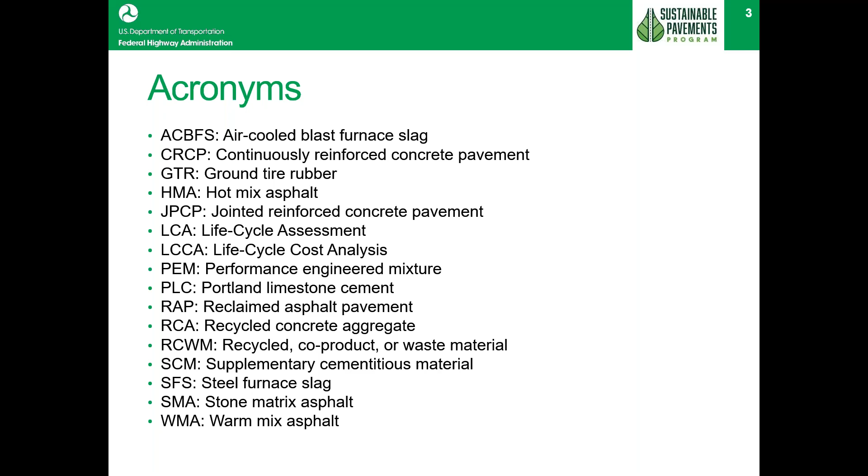Good morning and good afternoon to some of you. I would like to welcome you to the Sustainable Pavement Systems webinar series. Today's webinar will be on pavement end-of-life considerations, and our presenters for today will be Tim Aschenbrenner and Rick Menninger.

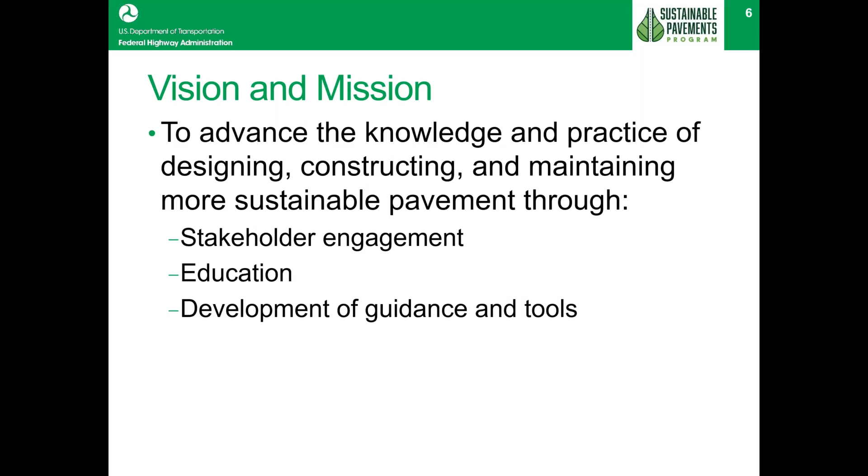Before we get started, I would like to let you know a little bit about the FHWA Sustainable Pavements program, which began in 2010 with the vision and mission to advance the knowledge and practice of designing, constructing, and maintaining more sustainable pavements through stakeholder engagement, education, and development of guidance and tools.

Some of those tools include the Sustainable Pavement Systems webinar series. Today is the 6th of the series of 10 webinars. You will receive 1 professional development hour per webinar, and upon completion of 8 out of the 10 webinars, you will receive a course completion certificate.

The Sustainable Pavements program also developed the FHWA Sustainability Ambassadors, a group of FHWA employees from different disciplines whose goal is to expand the knowledge and outreach within their field that complements the Sustainable Pavements program.

From today's webinar, you could learn what end-of-life considerations are and how they relate to pavement sustainability, some end-of-life options for asphalt and concrete pavements, and strategies to improve end-of-life sustainability of asphalt and concrete pavements.

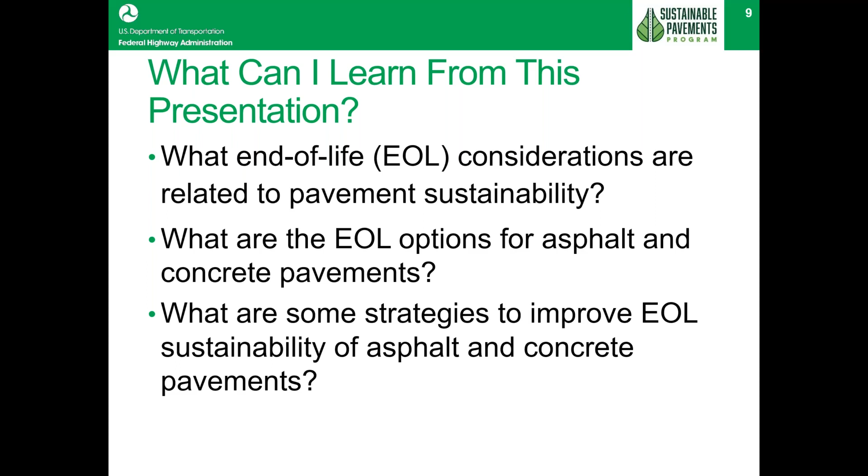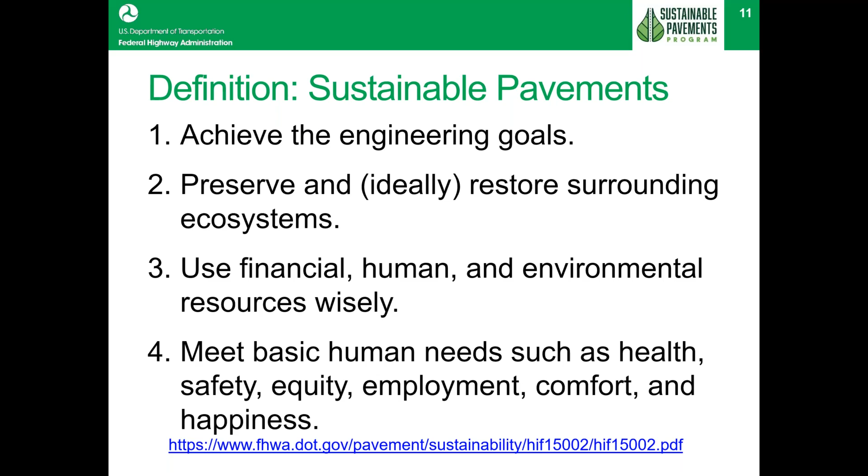Before we get into end of life, we should learn why we should care about pavement sustainability. From the program, we developed the definition of sustainable pavements: 1, to achieve the engineering goals; 2, while preserving and ideally restoring surrounding ecosystems; 3, use financial, human, and environmental resources wisely, while meeting basic human needs such as health, safety, equity, employment, comfort, and happiness.

With that, we've focused on the triple bottom line, the benefits of being more sustainable, looking not only at economic benefits but also environmental and social, which include reducing energy and noise and improving air quality for environmental, and improved safety, ride, and conservation of resources for social benefits.

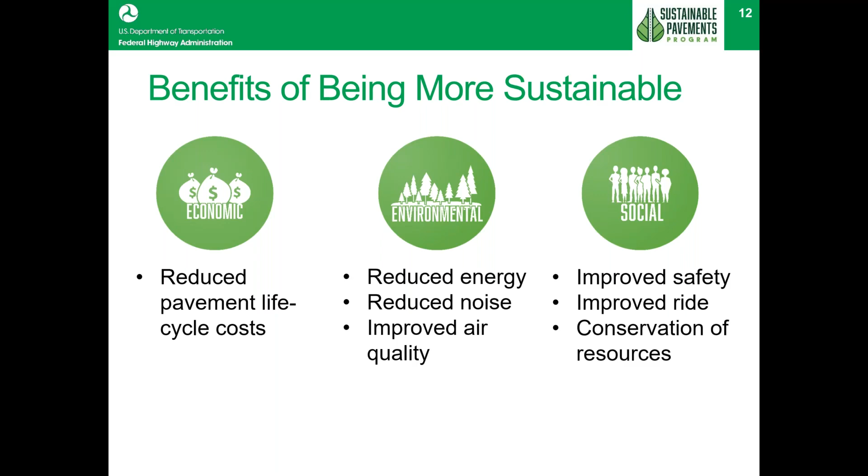Throughout this webinar, you will see that there are opportunities to improve sustainability throughout the pavement life cycle. Today's webinar will only focus on the end-of-life considerations.

With that, I would like to pass on the webinar to our first presenter, Mr. Tim Aschenbrenner, a senior asphalt pavement engineer with FHWA headquarters on the pavement materials team. Mr. Aschenbrenner specializes in asphalt pavement and materials as well as quality assurance. He joined Federal Highway in 2012 as a mid-career hire into the Resource Center, and prior to that he was with the Colorado Department of Transportation for 25 years, as the state materials engineer for 9 and the construction engineer for 3. With that, I'll pass the microphone to Tim Aschenbrenner.

Okay, well, thank you, Monica. Before I get started, I just want to do a check. Monica and Kurt, can you hear me and can you see my slide?

Hello? Yes, Tim, I can hear you. We can see it, and your sound quality is good. Okay, thank you. Just a little bit different than we did our practice with the changes, but yeah, I'd be glad to go over some of the

End-of-life considerations on pavement sustainability. So pavement end-of-life, what is end-of-life? I'll define it through some examples. The primary categories are reuse, recycling, and disposal. Each one of these options has costs, both economic and environmental, and these have to be considered on a project-specific basis.

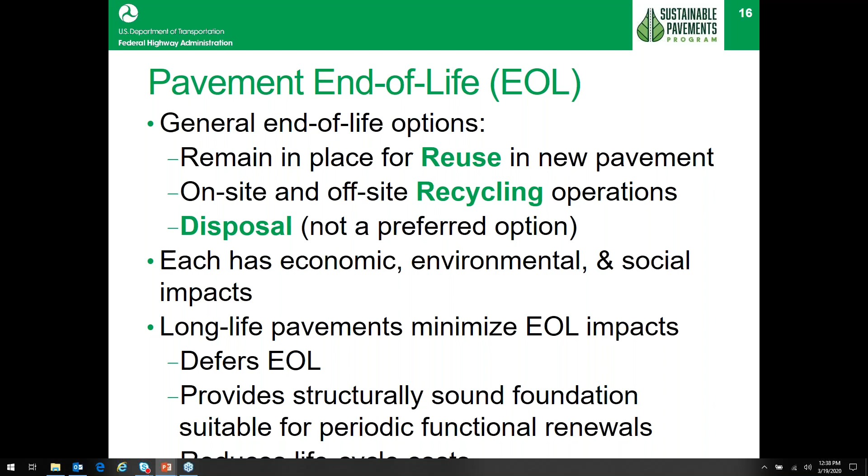Life cycle assessment, LCA, is how we evaluate the environmental impacts. I'd like to emphasize that having a long life pavement is a very important strategy to minimize end-of-life impacts. Deferring that end of life to a time out in the future is important, and that involves building a structurally sound foundation that may only require periodic functional renewals on the surface. That process really reduces overall life cycle costs.

In looking at end-of-life considerations, there are several options to get a realistic input. Some of these are off-site or on-site. Off-site might be a plant located off-site; on-site could be different types of in-place recycling. Demolition and disposal costs are self-explanatory, and might include tipping fees or demolition cost. Transportation is also a factor since we have to haul those materials, and I'll go over transportation costs in a little bit.

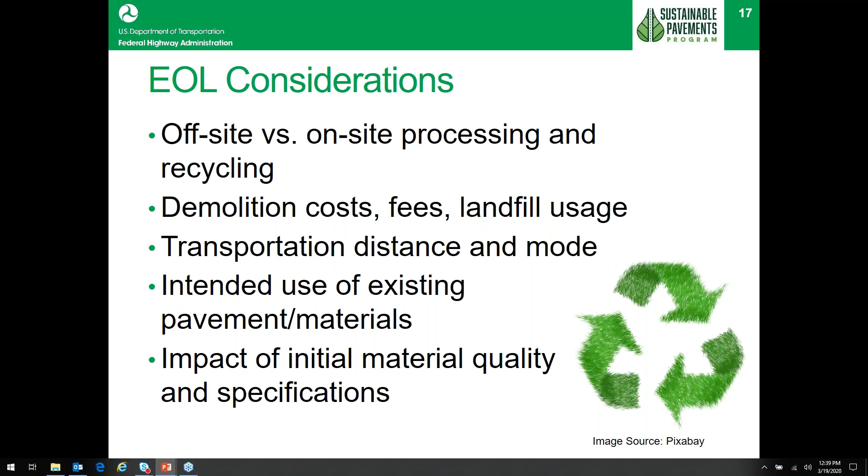The intended use or application is also important. If you're going to use that material in a surface layer, a base layer, or an embankment or fill, that impacts the processing of the material, since the quality needed is different in each of those layers. So quality is also a big impact.

On the previous slide I mentioned five end-of-life considerations, and here's one I'll go over as an example: on-site processing. For on-site, costs are generally lower. We'll have reduced fuel use because we're not hauling the material, or at least not hauling it far. There are certainly social benefits as well.

Yourself and your neighbors always experience traffic delays going through a construction project, but it won't be as bad if the construction traffic itself isn't causing those delays. So for on-site processing, there's a big social benefit from reduced traffic, and the economic benefits of having the material and processing costs right there on the project are substantial.

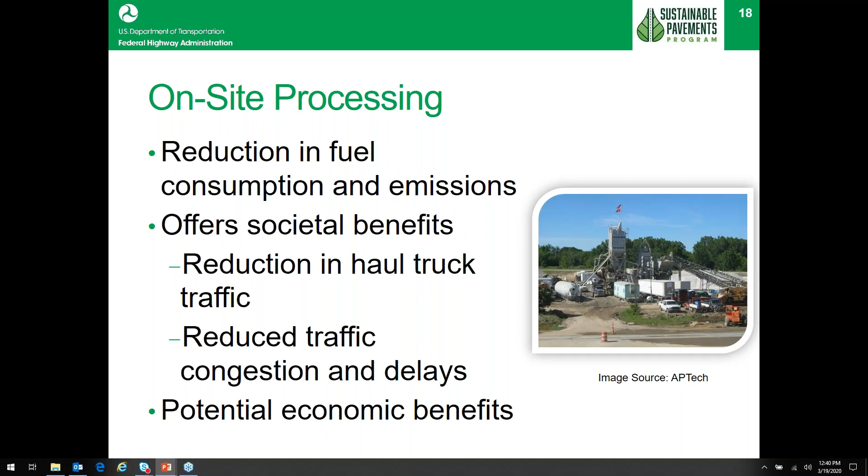For pavement end of life, I mentioned the three options: reuse, recycle, and disposal. To discuss the importance of reusing or recycling, consider the example of depletion of quality aggregates. This depletion is occurring—even where I live, there's an aggregate source I'm familiar with that built many projects, and now it's been reclaimed into a nice scenic lake. New aggregate sources aren't coming in very often.

So we really want to reuse and recycle as much as we can. Theoretically or ideally, we might talk about a zero waste pavement construction stream. That would mean that as a pavement reaches its end of life and we build a new pavement meant to last a long time, we make sure to use all of those materials back in the new pavement. That would be a zero waste construction stream. Although idealistic, it's probably close to happening with several pavements now.

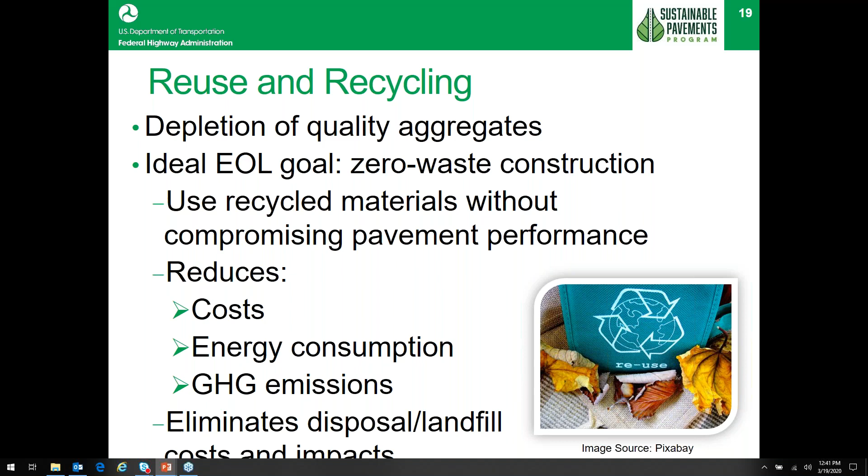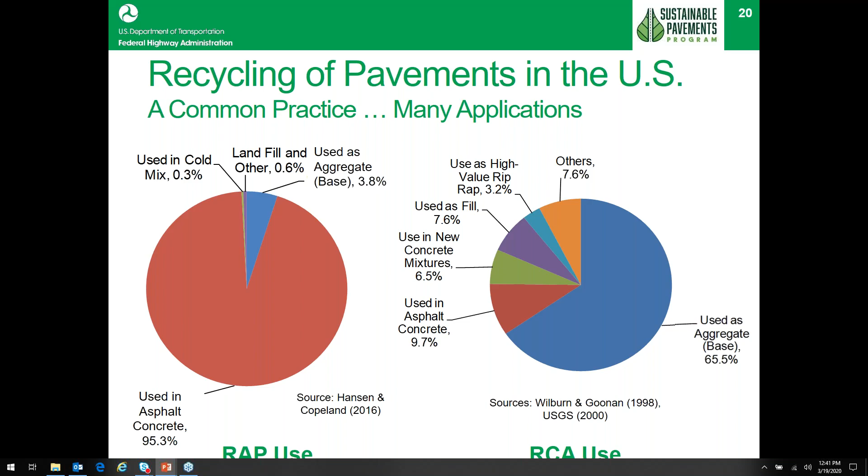So I think in pavements we're being very conscientious in this area. If we look at asphalt and concrete—RAP, the reclaimed asphalt pavement, or RCA, the recycled concrete aggregate—very little, if any, is going to landfills. It's being reused: about 99% of asphalt pavement is recycled or reused. In 2012, that was about 60 million tons. There's about 140 million tons of concrete, including both pavement and demolition, in 2014. This is a valuable material that is being reused often.

Now, transportation is a big process, whether we're moving materials from a project site to a central plant or to a landfill, and most often it's done by trucks. You can see that trucking is the most expensive method, so really minimizing transportation of these materials is a key consideration.

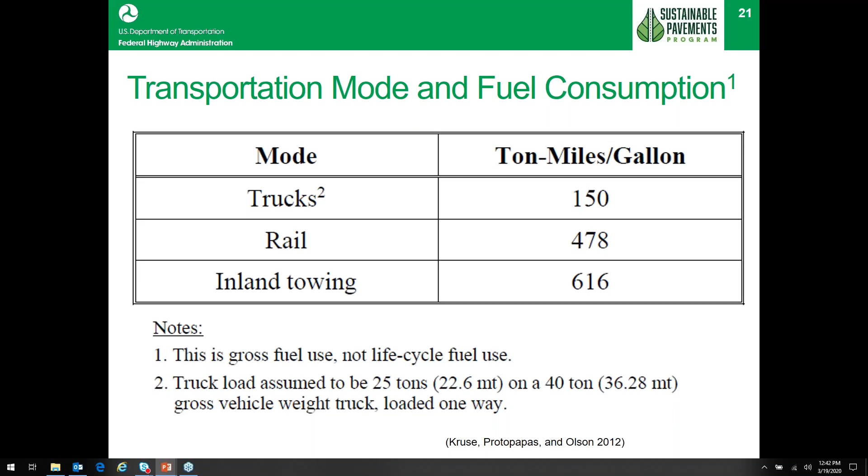As we look at reuse and recycling, we can try to optimize how much we reuse or how much we recycle. To optimize, that includes economic, environmental, and social impacts that are done in an LCA, or life cycle assessment method. Clearly, we don't want to compromise performance.

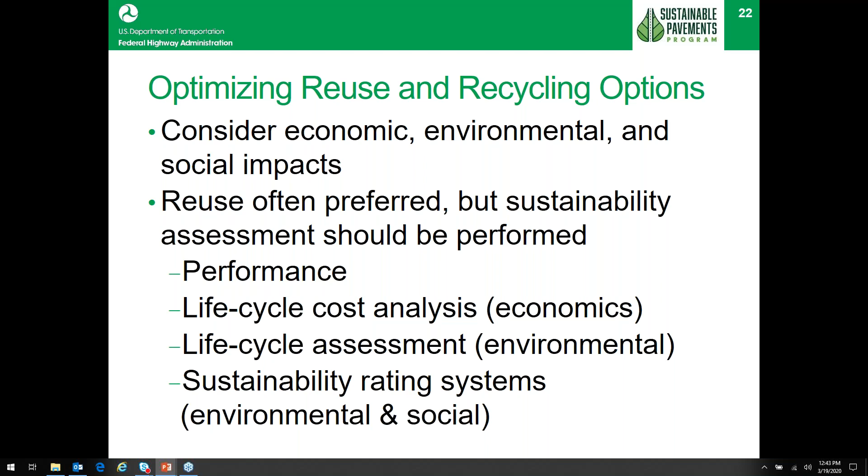Now, we had a long-lasting pavement before. We want to make sure we have one again. But these tools can be used to do this optimization. One is life cycle cost analysis, which looks at the economic benefits and trade-offs. LCA, as I mentioned, the life cycle assessment, looks at the environmental impacts. Then there's also sustainability rating systems that look closely at the environmental and social impacts.

So that section was on pavements in general. Now I'm going to shift a little bit and talk about asphalt pavements specifically and end of life. Not surprisingly, we have reuse, recycling, and disposal. Reuse, an example of that with asphalt pavements, might be a perpetual pavement that has a strong foundation, perhaps a crack relief layer, and then a sacrificial surface layer that's milled and overlaid at periodic times.

Recycling, examples of that could be in-place recycling with full depth reclamation or cold in-place recycling, or even at a central plant. And then disposal, although not preferred, we really don't see that much with these pavement materials because they have such a tremendous value. They're almost always reused and recycled.

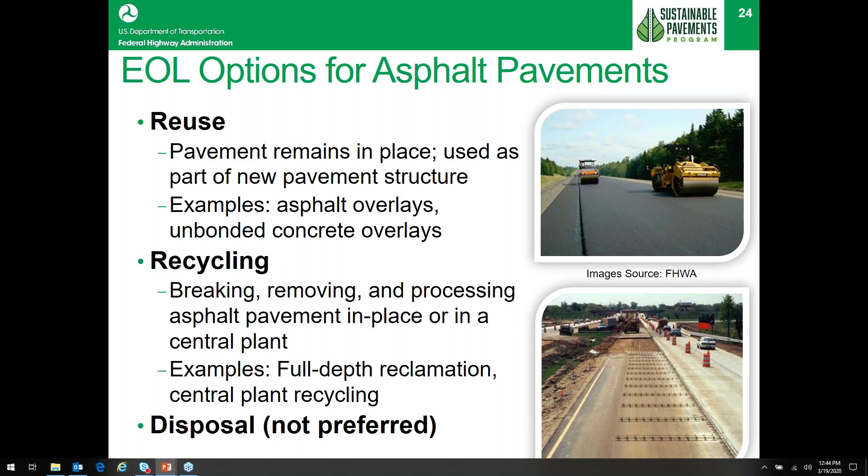So for reuse, if we were to look at reuse and want to evaluate a pavement, here's a series of questions you might ask to see if it's appropriate. Some of the most important ones are: is the foundation providing adequate support? Is there a lot of patching or blowouts? How much repair is needed? These questions can help guide if we're able to reuse or not.

And if we are able to reuse it, some strategies with asphalt might be some corrective milling prior to an overlay, or perhaps a concrete overlay to address load carrying capacity.

Now, reuse may not be feasible. Sometimes there are geometric and safety issues that develop. Could include clearances under overpasses, needing to change the alignment for clear sight distance, side slopes needing to be adjusted, and so on. But these are all factors that should be considered when you look at reuse.

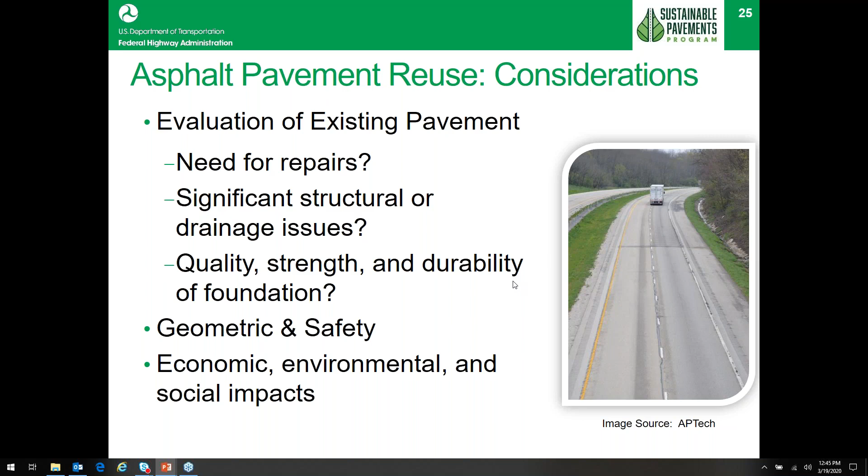We're not always able to reuse, so a second option is recycle. And when we look at recycle, again, there's a series of questions you might ask yourself if you're going to use that material to recycle. Again, we don't want to compromise performance.

We want to make sure we get that same long-lasting pavement whether we reuse or recycle. Hauling distances are a factor. We have to know what those distances are in order to do the calculation of the costs. Sometimes we need to ask if we can recycle that material in the future.

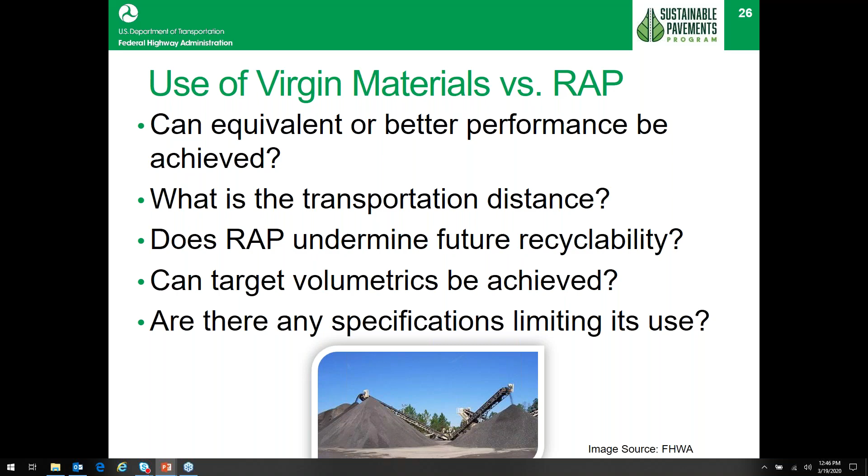Producing a mixture with RAP, say you're using RAP from a hot plant and you want to construct a new pavement, there are some factors there you have to consider in terms of the mix design. Also, agencies have limits, and this is for good reason. Agencies often limit the amount to make sure they get the high quality pavement that will last a long time, and that could be limits in terms of the amount of RAP or things of that nature.

And when we recycle, there's a couple of ways we can do that. One way shown here is central plant recycling, could be a hot central plant, or as shown in the photo there, a cold central plant processing. By central plant, what I mean is it's just a process where the asphalt mixture goes to a central location, could be combined with some virgin aggregates, maybe some new asphalt binder or recycling agents to produce the paving material that's placed on the project.

Most commonly it's done as hot central plant recycling. That's done in every state, and almost every project now is really using recycled materials. When RAP is used in the hot plant, the aggregates are superheated such that they can transfer heat to the RAP. This removes moisture and allows for mixing of the RAP. Key part is you've got to make sure the moisture in that RAP is lower, because that will impact the amount of fuel costs. So RAP is done almost everywhere.

Now, cold central plant, that's not as common. It is effective. I will say Virginia is one example, just did an excellent job with some interstate pavements using this technique. No heat is used, but that reclaimed asphalt pavement, that RAP, is added with an emulsion, perhaps a recycling agent, and mixed cold in a plant.

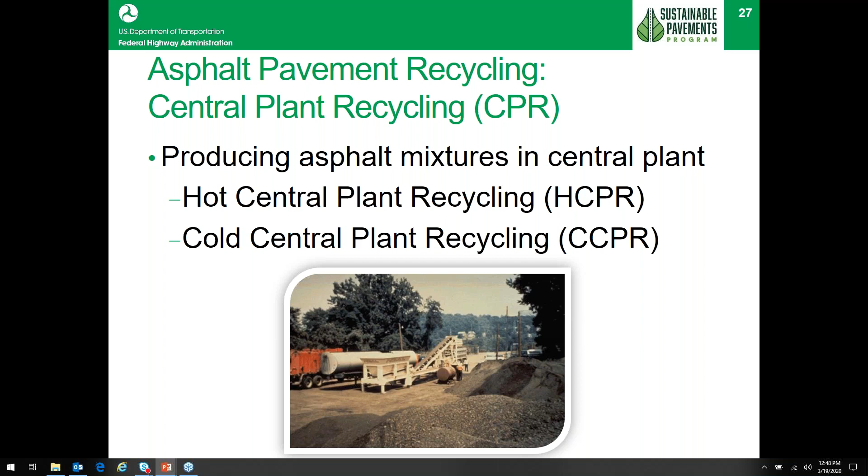Sometimes virgin aggregates are needed if properties need to be adjusted, and it can be used for bases, sub-bases, or even surfaces.

Now, in doing central plant recycling, it's not like you can just do it. There are factors you have to consider to make sure you get that long-lasting pavement. Sometimes when using high quantities of RAP, that reclaimed asphalt pavement is fractionated - put into different sizes, each in its own stockpile. That allows plant operators to make adjustments in the plant to ensure the overall mix has good quality.

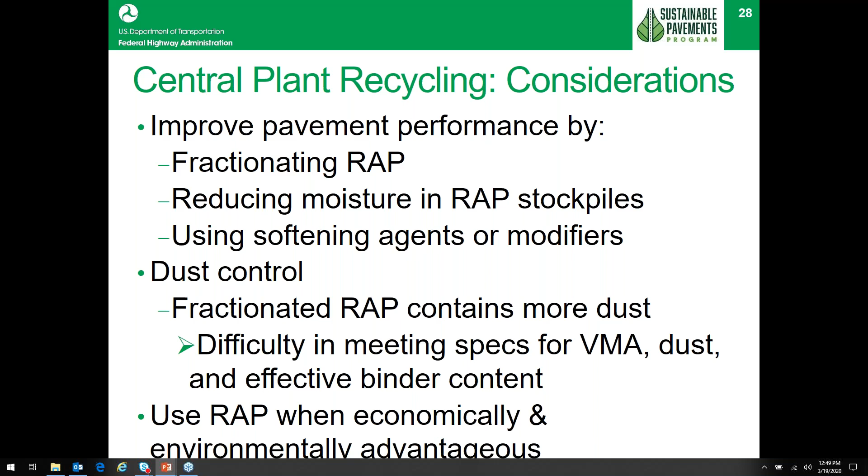Dust control is another factor. When using RAP, more dust is often created, and that impacts the mix design because we want a quality mix design. This could impact the voids in the mineral aggregate or the dust to binder content. Although a lot of plants have controls to manage the amount of that P200 going back into the mix, it's definitely a consideration when looking at using RAP and the quantity of RAP being used.

In addition to using RAP at a central plant, there's also in-place recycling, which can include hot in-place recycling, cold in-place recycling, or full depth reclamation. This slide talks about full depth reclamation as one example. As shown in the photo, a reclaimer pulverizes the existing asphalt pavement and a couple inches into the underlying base or sub-base to provide a homogeneous material. Then a surface course is placed on top.

Full depth reclamation includes a reclaimer and then a nurse truck, typically with emulsion added in. That process is extremely cost-effective and beneficial. The material is right there on site, so there's no hauling, no purchasing new binder, no purchasing new aggregates, resulting in reduced costs. It's very efficient in terms of time, reducing the time of lane closures.

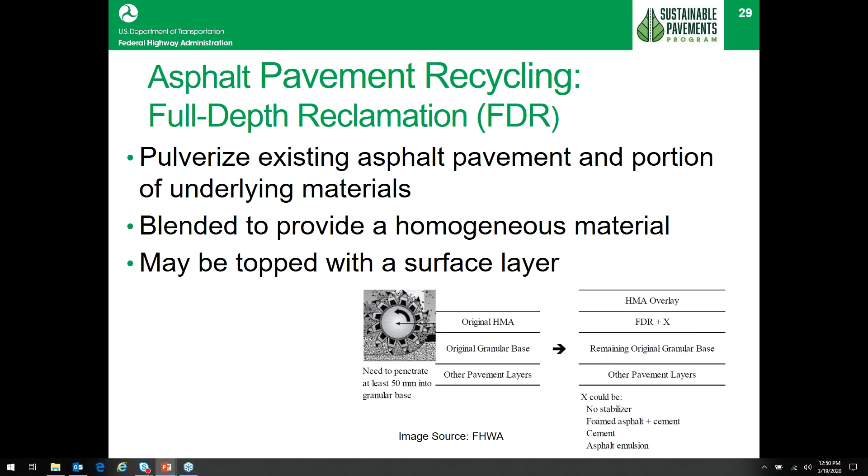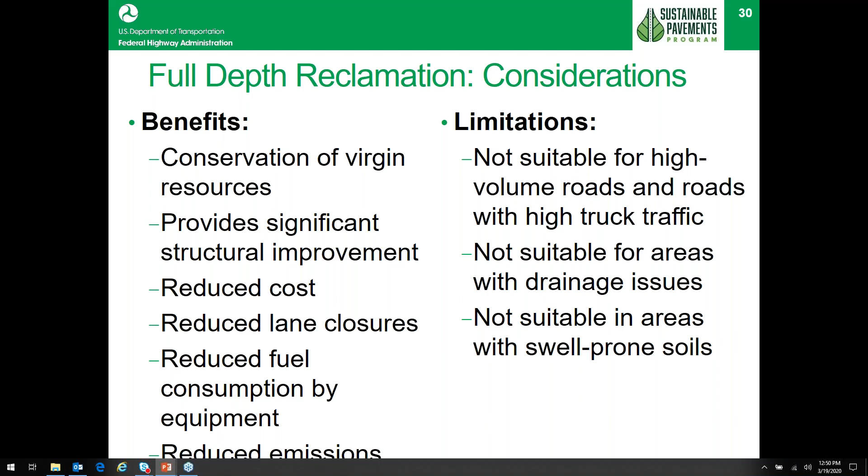There are a lot of benefits with in-place recycling, listed here. These can be project specific, so you need to look at them on a project by project basis. There are some example limitations that may apply to some projects and not others, but they really need to be considered when looking at full depth reclamation or any of the other in-place recycling processes.

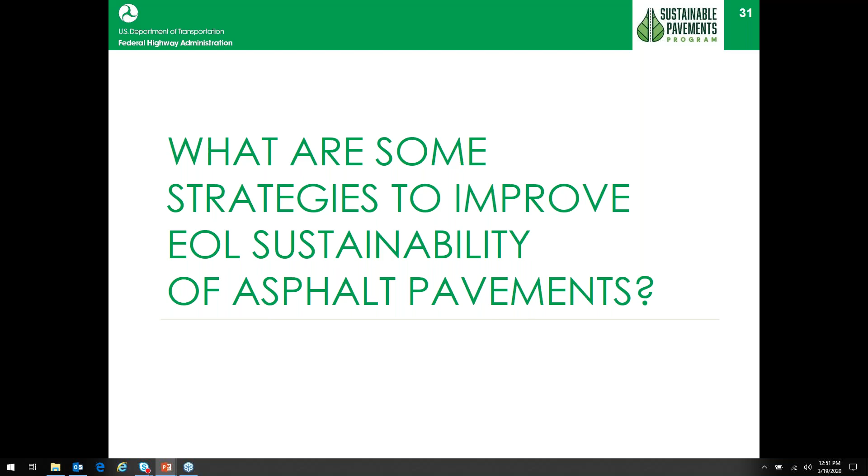So what are some strategies to improve end-of-life sustainability? I'd like to highlight a reference document on the FHWA website called Towards Sustainable Pavement Systems. It's about 500 pages long, so it's not the type of document you'd read cover to cover, but as the title says, it's a reference document. If you want more on end of life, chapter 8 has about 32 pages. I'm going to go over 3 strategies taken from this reference document.

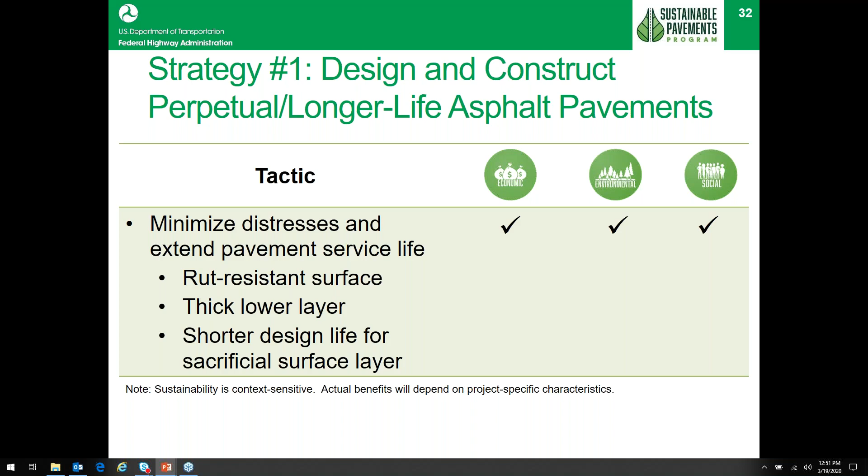Strategy 1 is perpetual pavement: solid foundation, crack relief layer, sacrificial wearing surface. That meets the economic, environmental, and social benefits of longer lasting pavement. It's a very solid approach.

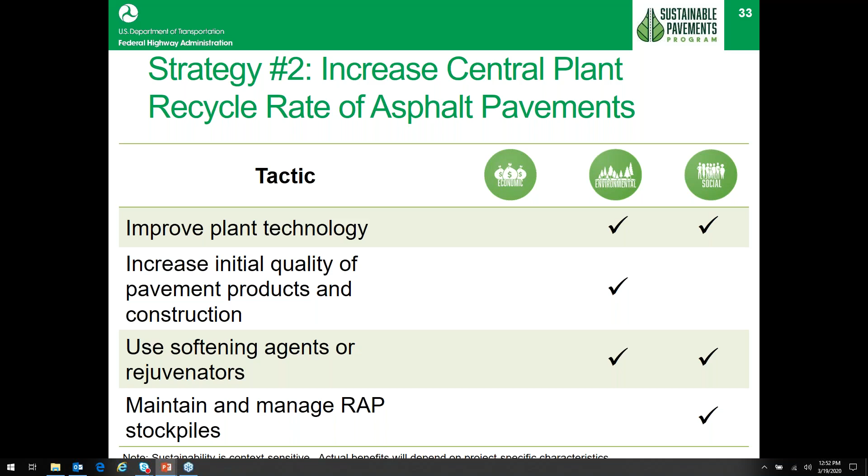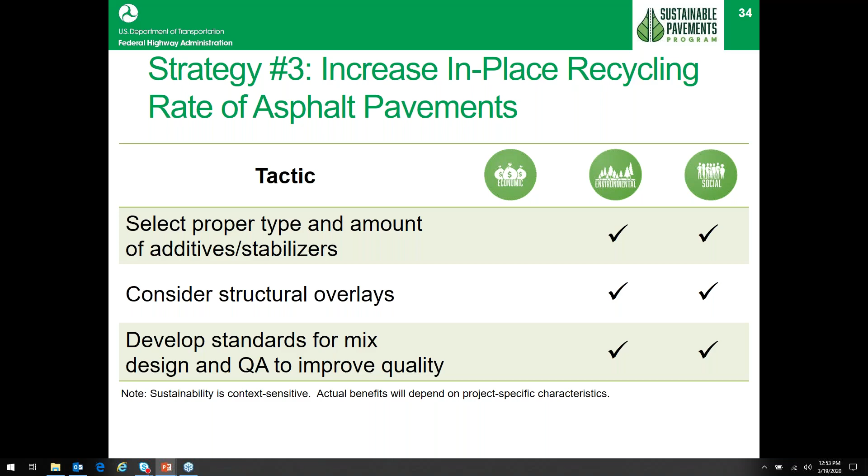So again, I'd encourage you to check out that reference document.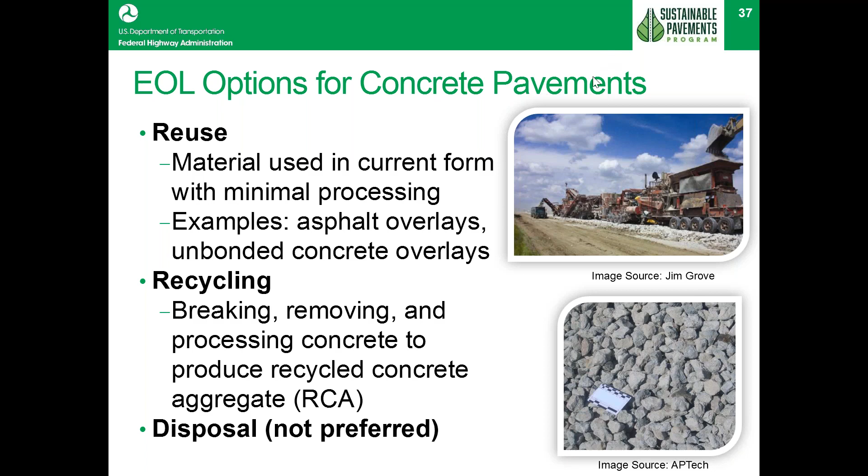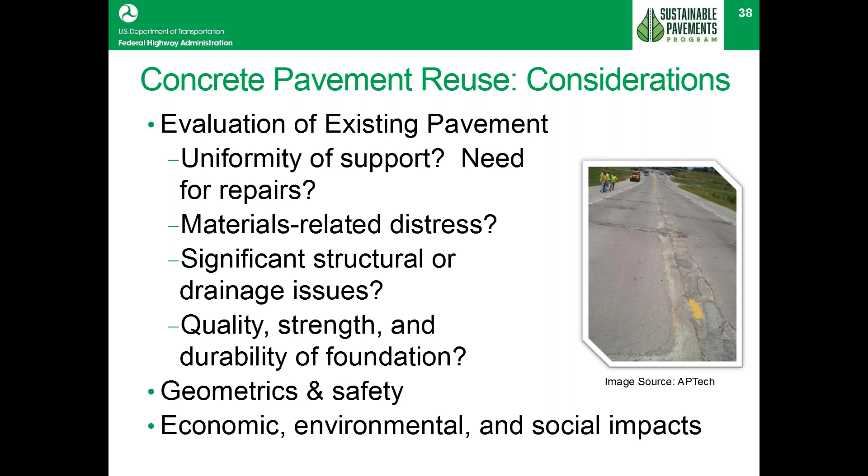Other considerations of whether you could reuse the existing pavement are things such as: will the old pavement provide uniform support? Does the pavement have correct drainage, or will there have to be some sort of geometric realignment of the pavement, or reworking of shoulders and some of the guardrail configurations? This can all enter into the decision of whether you can reuse a pavement in place.

Another consideration is whether you're going to use recycled aggregates, RCA, or virgin aggregates. It may boil down to local considerations, what local aggregates are available. If there are quality local virgin aggregates nearby, that may be the best option. In other cases, where virgin aggregates have to be hauled in from far away, you'd look at using recycled material, perhaps upgrading local aggregates, or coming up with a blending option to best use the local materials.

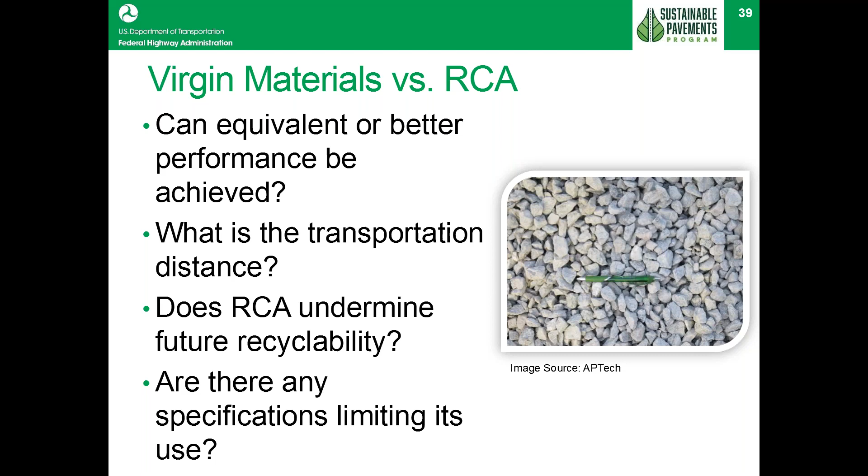Anytime you recycle aggregates, you want to make sure the aggregate won't undermine future recycling operations. Does it have steel fiber in it, or some other consideration that may make it very difficult to recycle?

There have been a few pavements built with a two-layer concept, where the lower quality RCA aggregate or local aggregates is used in the lower layer of the concrete, and then a new layer of concrete is placed wet on wet concrete on top of the recycled aggregate layer. You get very good bonding, and the aggregate in the top layer would be of higher quality. This was done, for example, on the Illinois Tollway, and there was a demonstration project on I-70 in Kansas that used recycled aggregates in that way.

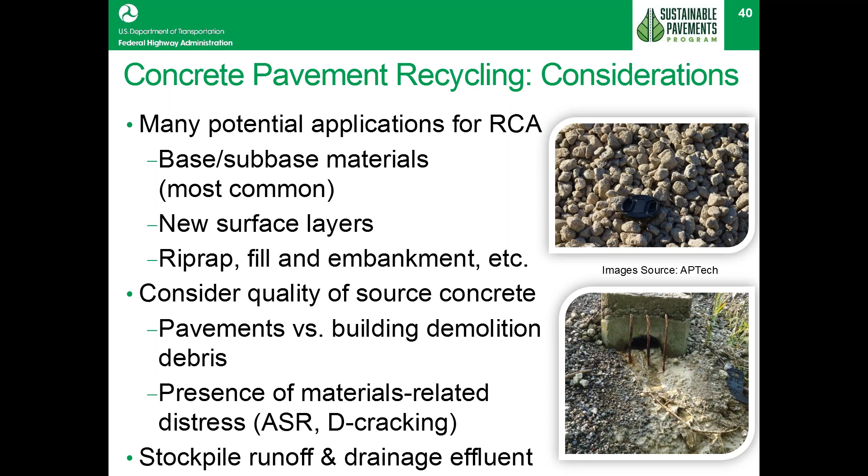Another thing in recycling aggregate back into new pavement: in general, you don't want to use a pavement that has had ASR or D-cracking back into a concrete pavement. It would be better used as a granular base course. Next slide.

We've done a little work in our laboratory doing petrographic work on RCA materials, and typically you will have a higher porosity, which needs to be taken into consideration both for strength and durability. The higher absorption capacity of RCA often results in higher water demand and more rapid stiffening of concrete. It's very important to pre-saturate RCA coarse aggregate prior to mixing, and normally RCA fine aggregate is not used back in concrete because of the high mixing water demand. But all of the RCA aggregates can be used in dense graded bases or in cement treated bases as well.

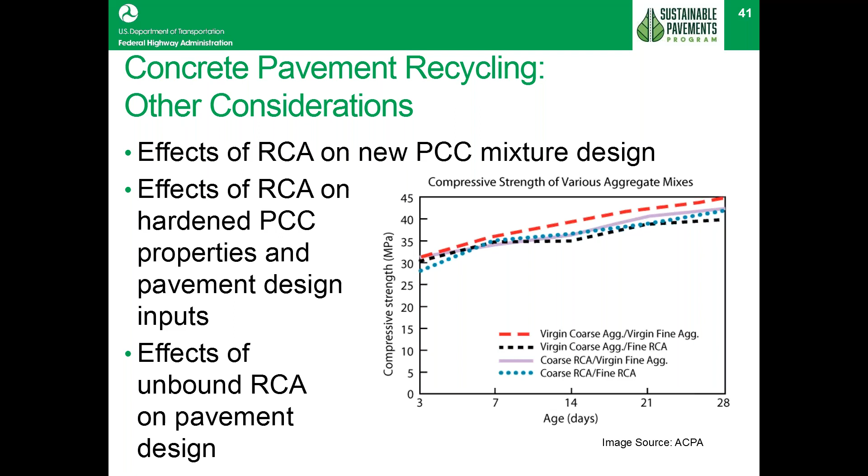Let's go on to the next slide. What are some of the strategies to improve end-of-life sustainability of concrete pavements? We're going to take a look at a couple of these strategies.

As Tim mentioned, when we're looking at strategies, we would look at the cost or economic basis. We would also look at the environmental effect of the different materials being used, and how long the particular pavement will last. And then we also look at the social considerations as well, like noise, dust, truck traffic - how well will it serve the community that you're building it in.

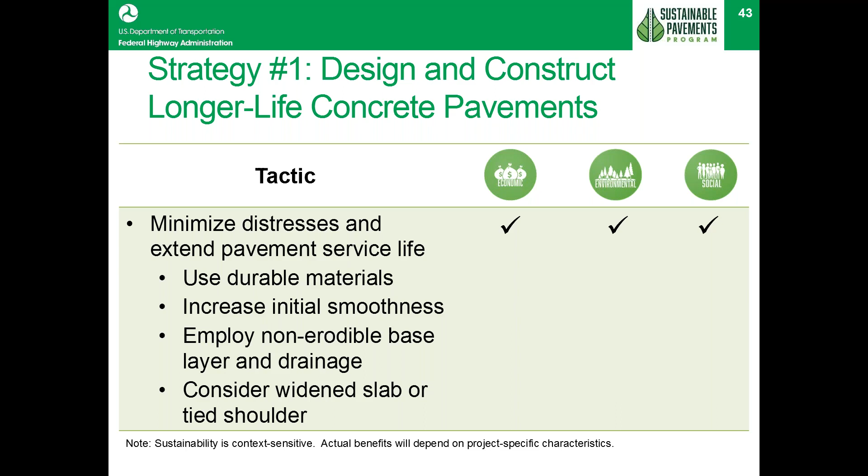There are a number of states that are also now using continuously reinforced concrete pavement. Of course, these are generally built fairly thick with the steel reinforcing at about mid-depth, and they will last quite a long time if you use durable materials. So this is certainly an option for a longer life pavement. As Tim mentioned, Chapter 8 of the Sustainable Pavements reference documents has much more detail on these different strategies.

Strategy number 2 is to optimize the use of the RCA. You would want to adjust the RCA production operations for the particular use you're going to use it for. This would be a lot easier in an RCA crushing plant dedicated to a particular project. If, on the other hand, you're doing urban recycling, the quality of the RCA is probably going to be reduced due to the fact that concrete comes from a number of different sources, and typically that may only be used in granular base or the cement treated base option.

Customize the preparation and breaking of the source concrete. In other words, try and break up the concrete in the most optimal way so that the crushing and screening operations will go smoothly. And as I mentioned before, using the RCA in the bottom layer of a two-lift Portland cement concrete pavement, that's certainly an option to optimize the use of the RCA.

In one of the Illinois toll road projects that I'm familiar with, they were actually using some of the coarse recycled RAP from asphalt pavements back in concrete pavement in the lower lift. The RAP did not have much asphalt content on it, and it met the strength and durability requirements for the project.

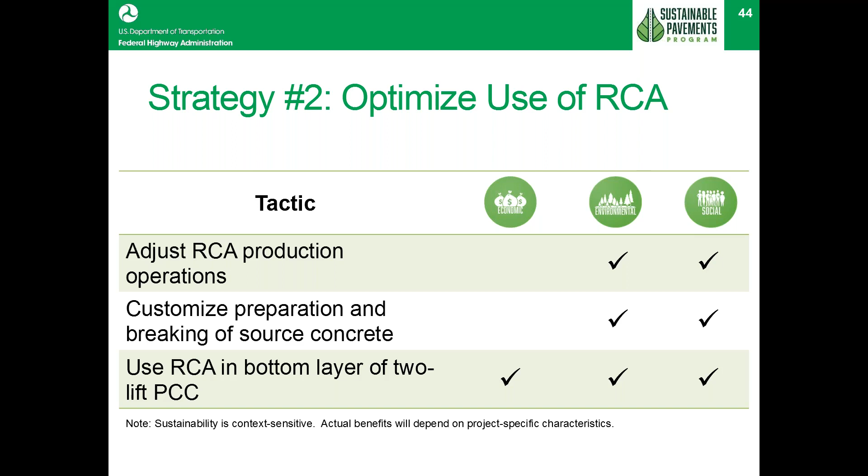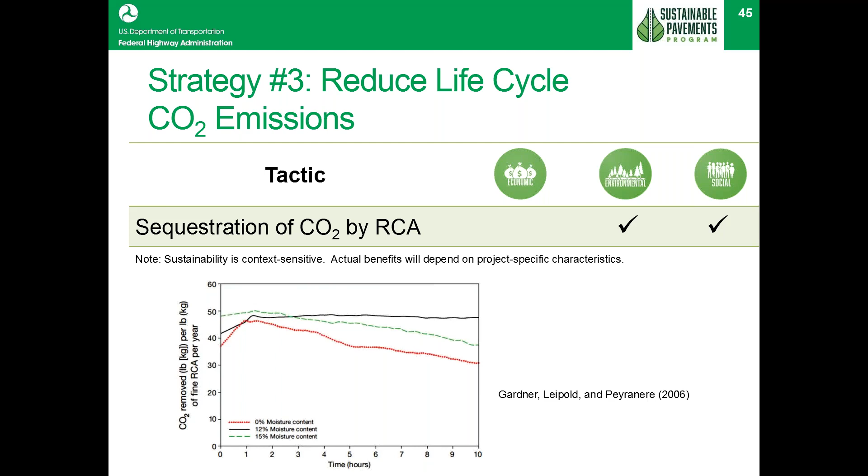The next slide is we're going to do just an overall summary here of what we've been talking about with the end of life webinar. Some of the general key takeaways are that the options depend quite a bit on the type and quality of materials used in the pavement design, whether that particular pavement is a long life design, and maybe all you have to do is put a new wearing surface on it and not have to disturb the strength of the foundation itself.

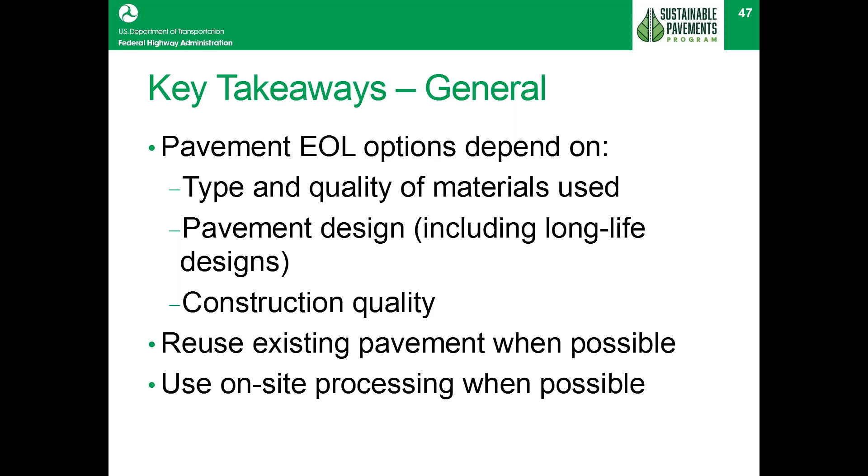And the construction quality. Obviously, a better constructed pavement is easier to either reuse or recycle. In terms of reusing the existing pavement, if you can do that where possible, that certainly saves a lot of energy and time. And when you do recycle the pavement, on-site processing is preferred over having to haul the material back to a crushing plant and then bring the material back to the project.

Another general key takeaway is many recycling and reuse options are available, and in general, each option is site specific, and it depends on the particular project that you have. It varies with the availability of materials, processing options, new pavement requirements, and construction scope. Assess the performance and economic and environmental and social aspects.

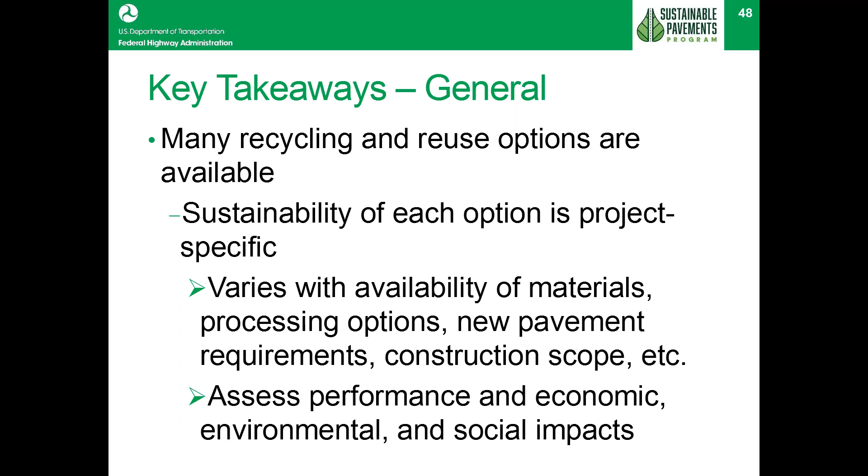So with sustainable pavements, we always want to look at the 3 aspects of economic, environmental, and social impacts. But we always want to make a pavement that's going to perform well and will last for a long time.

In terms of asphalt pavement end-of-life sustainability, Tim talked about using improved plant technology so that recycling can be done more efficiently, improve the initial quality of the recycled product. In other words, don't try to mix good quality RAP with other RAP that might have been contaminated or is from poor quality pavement.

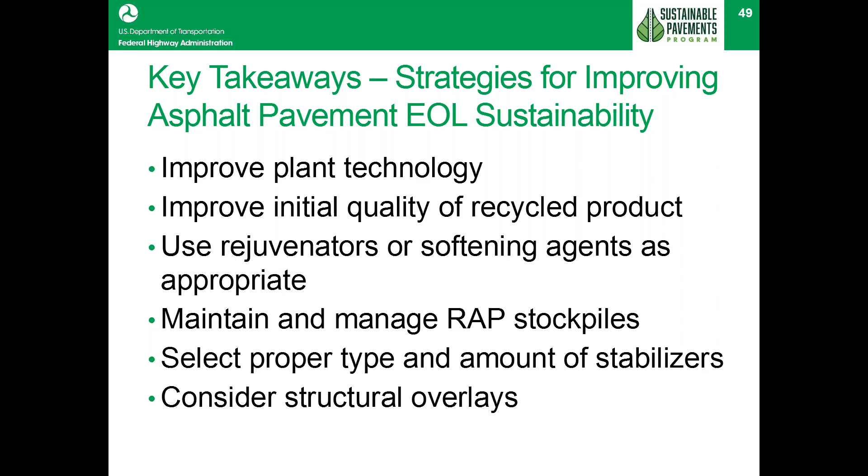Use rejuvenators or softening agents. Make sure your mix is properly designed for the recycling that you're doing. Maintain and manage your RAP stockpiles and try to, again, minimize poor quality material getting mixed in. And select the proper type and amount of stabilizers and consider structural overlays. Consider the structural strength of the existing pavement as well as the strength of the overlay that you're putting on so that the pavement is designed properly for the application.

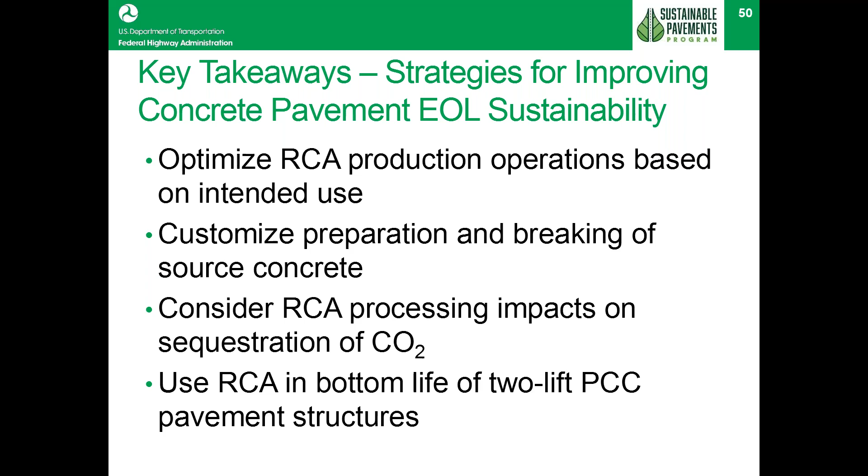In terms of concrete pavement end-of-life sustainability, you want to optimize RCA production operation based on the intended use, customize the preparation and breaking of the source concrete, and also consider in your environmental considerations the fact that you are sequestering some CO2 in the operation. And give consideration to using RCA in the bottom lift of two-lift PCC pavement structures.